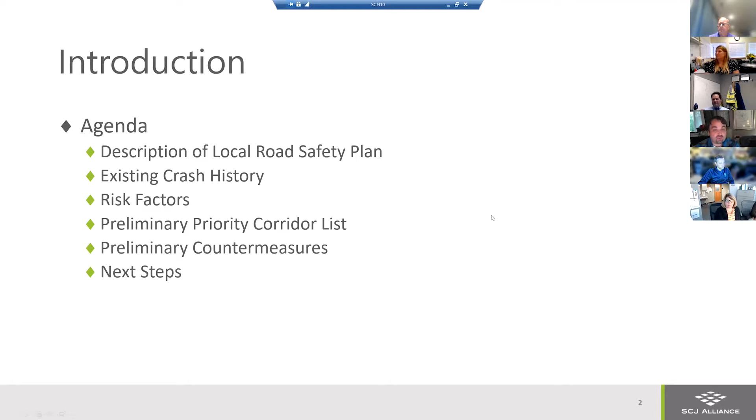For today, I'm going to walk through what a local road safety plan is, talk about the crash history for the city, and then walk through the process of determining risk factors and priority corridors, and then potential countermeasures. I don't know how many of you are familiar with the term local road safety plan, but the idea behind it is that it allows a city or a public agency, counties, states, at all levels, to take a data-driven analysis approach to safety and specifically focus on fatal and serious injury crashes.

That's been a bigger and bigger priority, and Target Zero, a statewide program, is really focused on trying to reduce and eliminate fatal and serious injury crash types. The data that we get for this process is provided by WSDOT. Whenever a crash occurs, police report to the scene and file an incident report that gets collected by WSDOT. WSDOT maintains a statewide database of any and all reported crashes in the state, which they make available to anybody. And we've solicited the last 5 years of crash data to try to get a representative snapshot of what's happening in the city.

And I would say too that while the data set's pretty robust, it only contains crashes that were reported. There are likely to be crashes that occurred that were not reported. And even more specifically, everyone's got those near miss experiences that weren't actual crashes, but were very scary and could have potentially resulted in a significant crash.

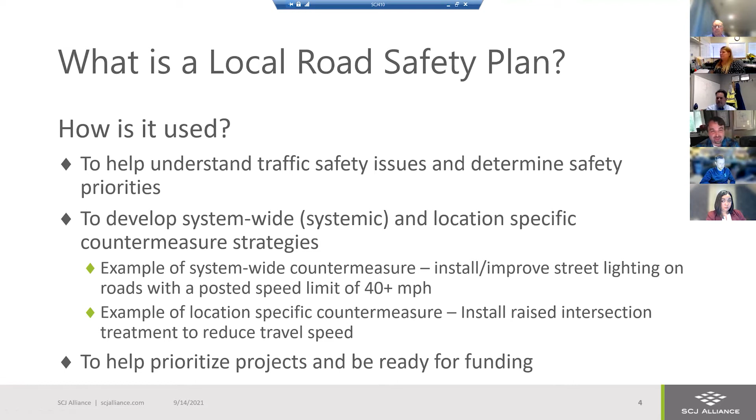So that's kind of an overview of what the local road safety plan is and what it's aiming to achieve. If there aren't any immediate questions, I can jump into the existing crash data that the city of Shelton has had.

We didn't specifically dig into crash rates for this effort. We were focused more on the individual serious and fatal crashes. And that's kind of what's driving the overall goals of this plan, but it's still good to know where the overall crash tendencies are. And so among those 832 crashes, there were 16 that were either fatal or serious injury crashes, which was about 2%. And overall, that's not necessarily out of line with other communities, but still 16 is a lot.

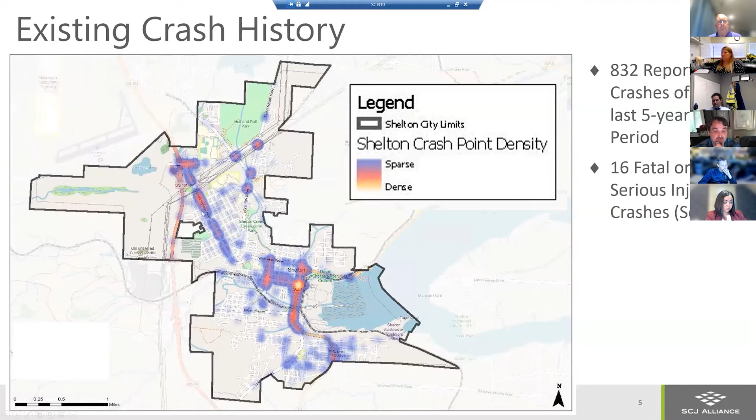And it's not hard to understand that those are especially vulnerable members of the roadway. And so when they're involved in any crash, the odds of it becoming a serious or fatal are much higher than two vehicles. But even with that, this was much higher than you would maybe see in other jurisdictions. So without having finished the process, we immediately assumed that this would be a focus of the study.

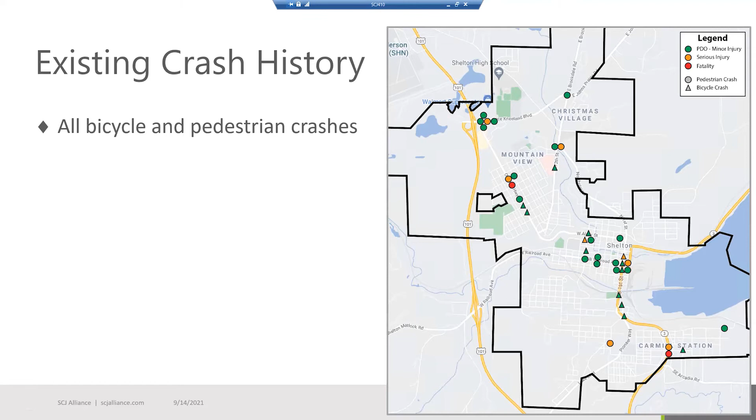So once we went through and looked at the crash history of the city overall and narrowed in on the serious and fatal crashes, the next step of the process is really breaking down each of the serious and fatal crashes and identifying the contributing circumstances or the roadway conditions that were present at each of those crashes. And those were referred to as risk factors, elements that seem to potentially have been contributing to a serious or fatal crash.

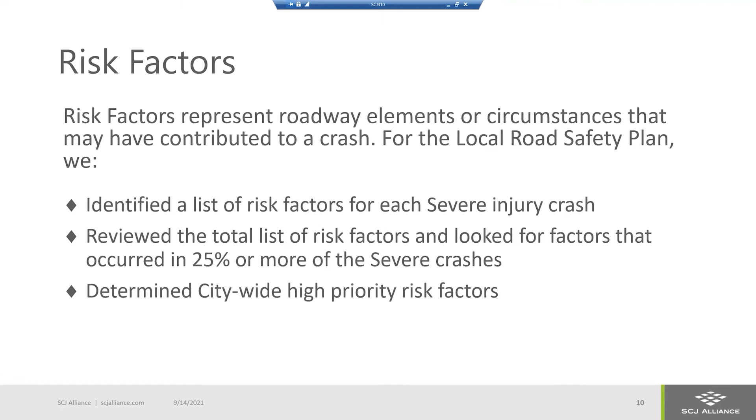So the process of a local road safety plan is to go through and individually identify those risk factors for each crash. And then when you've done that, you create a matrix where you identify how many instances each risk factor occurred for. And the methodology outlines that if you have any risk factor that shows up in 25% or more of your serious fatal crashes, it becomes a priority risk factor for that community. So we start to look for trends across the different serious fatal crashes. And once we did that process, we came up with these as our high priority risk factors.

And going back to what I was discussing a little bit ago, hitting a pedestrian or inattentive pedestrian crashes located along roadways. It wasn't surprising that pedestrian and bicycle elements were prevalent in this list because so many of the fatal serious crashes involve bikes or peds.

But what was a little surprising was that we really weren't finding any other risk factors that were consistent across the crashes. In the city, almost all the roads are low speed, so there wasn't really a high speed element to consider. A lot of these were on straight level roads, which is true for most of the city. Some were at intersections, some weren't. But again, there was no detailed distinction between these crashes, except that many of them involved bikes and peds.

So we went through a couple times because we were really trying to make sure we weren't missing something more broad. And there really didn't seem to be any themes to these 16 serious and fatal crashes, except that many of them involved pedestrians and bicyclists.

And so the next step in this process is typically to take your risk factors and apply them to your top corridors. So you say, okay, if these are the 5 risk factors that this city has, let's see which of our corridors that have a lot of crashes have those risk factors. And then those can start to be priority locations for potential systemic improvements.

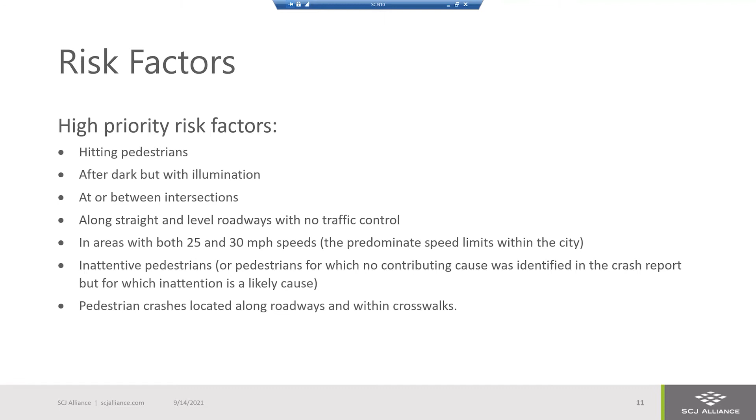Well, in this data set, really the only common trend was bike and ped involvement. We felt like that means let's go back to that map of all the bike and ped crashes, understanding that the serious and fatal ones were already bad, but any incident involving a bike or a ped could pretty quickly turn into a serious or fatal crash. And then match that with our list of corridors that we showed above.

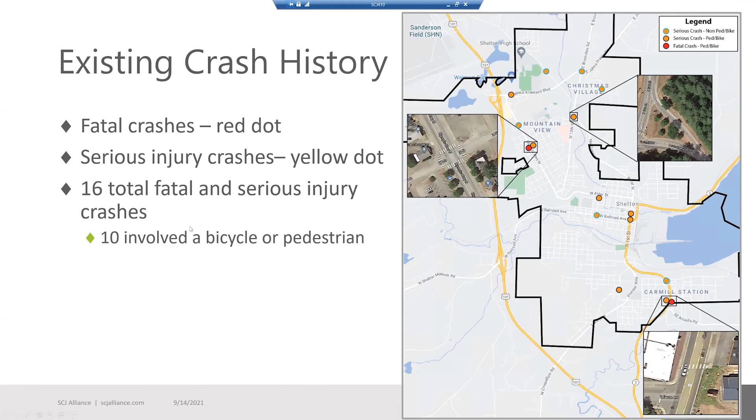And so we'll make that assessment, we'll work with the city and decide, for this crash, was there a deficiency at the intersection that we can resolve with a countermeasure? And if so, it'll be on the list, in addition to these corridor-wide priority areas.

So having said all of that, again, we're still in the process of kind of honing in on what exactly we want to recommend, but these next few slides kind of discuss countermeasures that can address some of the specific issues that we're either seeing or hearing about. And so these mini roundabouts, which aren't necessarily the same as a legitimate roundabout controlled intersection, can be located, especially in neighborhood corridors, as a way of calming speeds.

The city has some speed signs that they've recently been able to locate in different corridors in the city, and they can run those in ghost mode so that they're recording speed data without actually flashing your speed and telling you you're going too fast, and then they can turn it on and then it will flash, oh, you're speeding, slow down. And then we've been able to get a little bit of that data to just kind of digest, are there some clear speeding issues on some of these main corridors?

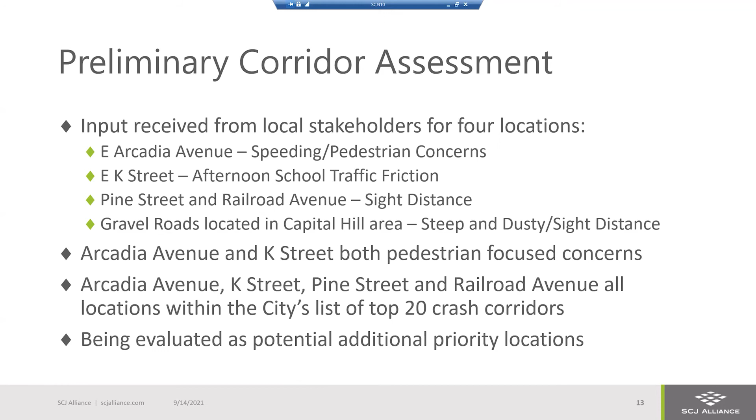going back up to here, East Arcadia Avenue was one of the spots that a local resident has expressed concern about multiple times. So the city very recently was able to put these signs up there. And again, in a broader sense, we didn't see any consistent themes of speeding, but I believe the high speed recorded was 67. So that's an obscenely fast speed for any of the roads in the city, but for a neighborhood like that, it's hard to say how much you want to chase down that one driver that was feeling reckless, but an improvement like this would make that much more difficult to do.

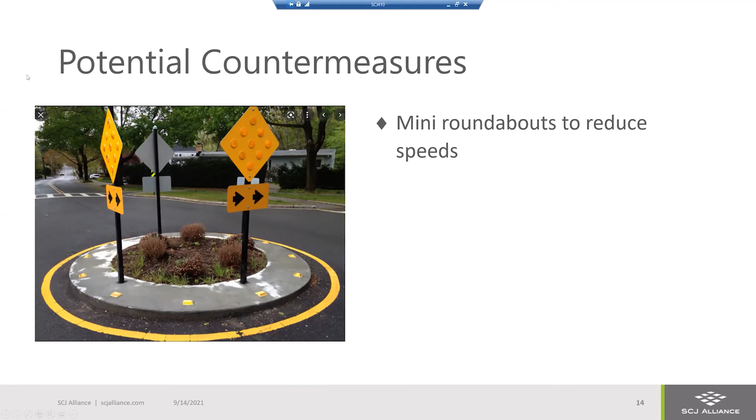So this is one of the potential countermeasures we're kind of expecting to include as candidates in the systemic corridor improvement, almost like a menu. If we were on our corridor, what things could we consider depending on the spot?

Another one, and this has come up a couple of times from you guys, is these curb extensions in areas where there's on-street parking to help minimize the crossing distance and also improve visibility. So these are really, really helpful in areas where there's on-street parking, and multiple corridors that we've identified, I know in downtown and also on Olympic Highway North, there is on-street parking space.

So even if there's not cars parked in it, as soon as the pedestrian steps off the curb, they're now at risk. And so the longer that distance, the more exposure, the more risk there is. And Joe mentioned something to this effect too, that he doesn't like the crossings of the four lane roads. That goes straight to this point, that the longer you're exposed, the more likely it is that something can happen. And so this is one of the ways that you can reduce that exposure while also maximizing the potential to be seen.

Megan, I see a hand on your screen. Did you want to go ahead?

Just wondering, in your experience working with other cities and downtown corridors and small towns like ours, have you seen additional designs like this with curb extensions to reduce the crossing distance, as well as similar designs that extend businesses out into parking areas to give them outdoor seating and whatnot? Have you seen designs like that that have helped reduce the amount of traffic, or the speed of traffic and whatnot? I recently was in Walla Walla, so that's why I asked about that.

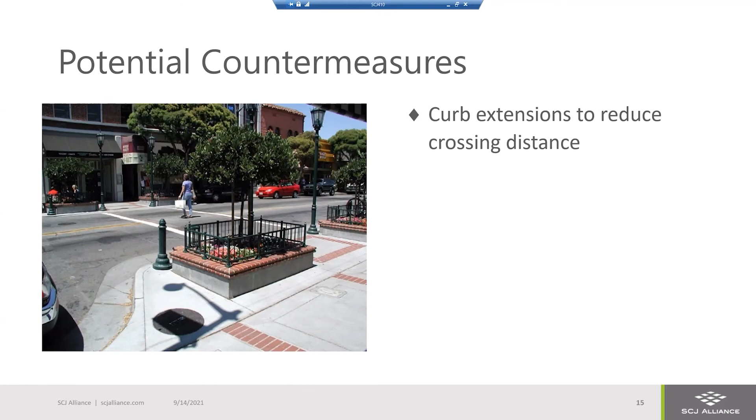I don't know if it's the right time to start talking about this, but I'd definitely like to talk more about prioritizing a project like this each year. I know we have some focus areas on roadway maintenance and improvements each year in our budget, but I'd like to consider prioritizing at least. Outside of the existing capital improvements, if we're doing other roadway improvements, we would resolve any safety issues at the time when we're doing that construction. But outside of that, if there's areas that we can prioritize, a project or two a year amongst some of our residential paving and other types of stuff, I'd be interested in having conversations on which of these projects would be feasible.

I know we have a limited amount of funding we can throw at this, but even potentially adding similar projects to our legislative priorities. I know Safe Routes to Schools was another opportunity through the TIB for some of this type of stuff, but I think the data that you presented was very helpful in wanting to try to tackle this one. So just throwing it out to the council. I like that idea, Joe.

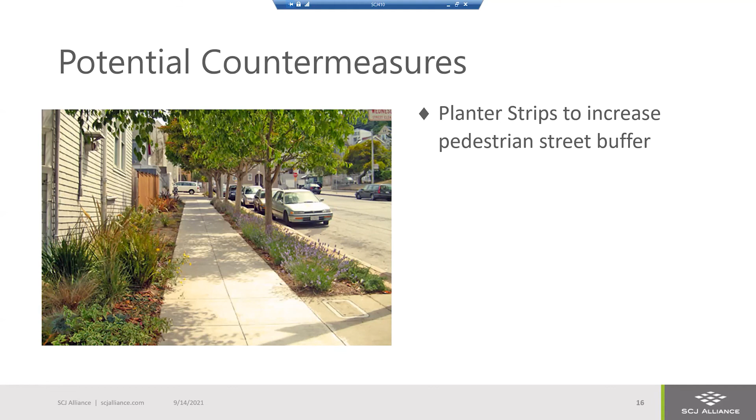It got mentioned earlier that the crossing for the junior high has got flashing lights, and so a way to amplify the visibility and safety is to have a truly signalized pedestrian crossing, and RRFB specific treatments are shown to be best performing in terms of vehicles adhering to them, or not enforcement, but success rate, I guess you would say, of the vehicles reacting. RRFBs specifically seem to have really good performance metrics for that.

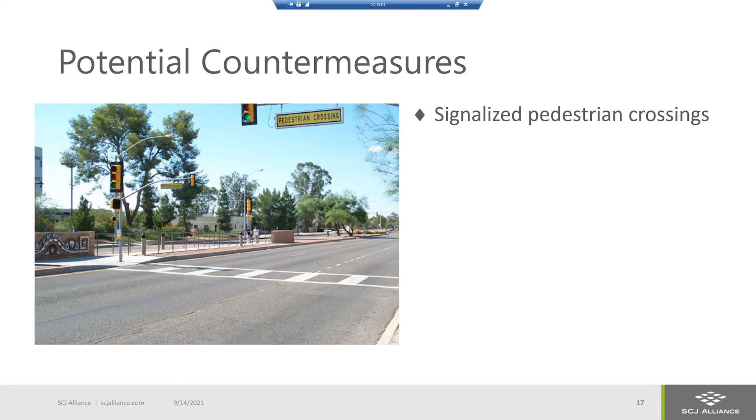So I think in specific spots, the junior high crosswalk for sure, and potentially other locations in the city where there are these uncontrolled crossings in the middle of a potentially high volume corridor, this is a specific improvement we almost certainly expect to have in the plan as a systemic improvement, and then likely multiple specific spots where we would maybe advocate for this treatment.

And then another one that hits on an earlier comment, this idea of refuges in the middle of a roadway. So yeah, the 4-lane, even 3 lanes actually work really well for this sort of treatment, because you can install it in the existing 2-way left turn lane space. But the more travel lanes there are, the more exposure. So this is just another tool in the toolbox for reducing that amount of exposure.

And I think this is one we would almost certainly expect to have in the plan as a systemic improvement. And then we'll be working with the city to figure out if there's specific spots we want to preemptively recommend this treatment for.

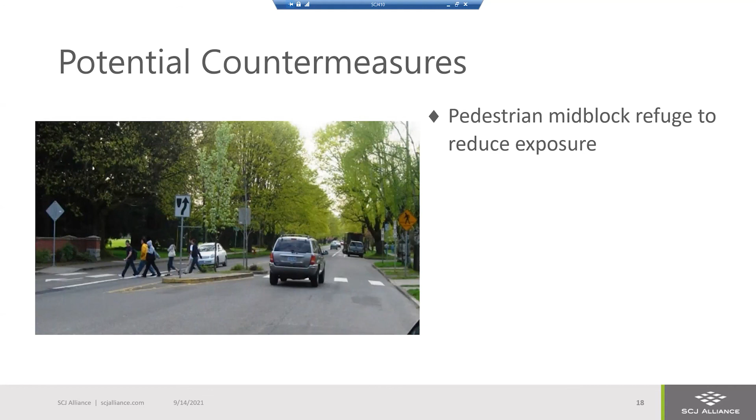So that's not the entire list of what we would potentially have in the plan, but those are some of the initial countermeasures that we've honed in on, knowing that pedestrian and bicycle safety is the priority. As we dig a little bit more into specific spots within the corridors that may be candidates for a recommended improvement, there could very well be other countermeasures that make sense. Those countermeasures that I just walked through all feel like systemic improvements that can be broadly considered on the corridors that we've identified as appropriate.

Like I said before, a menu of considerations, and I would expect likely most or all of those to be in the plan with a planning level cost estimate attached to them. The nice thing about those improvements is that by and large, their price tag is consistent regardless of where. The planter strip might be the one exception to that, but a lot of those other ones are really not going to cost more in one part of town or the other, versus some improvement types will depend on the specific spot, especially when there's right-of-way involved. If there's a right-of-way take needed, that dramatically changes the cost, and it would be specific to a spot.

But most of those improvements we can come up with a broad price tag for, and that'll be applicable wherever those improvements make sense. So I inserted this slide in the narrative earlier where I was asking for feedback. I've got a lot of notes here for some specific concerns or observed areas of interest, and that's exactly what we were hoping to get.

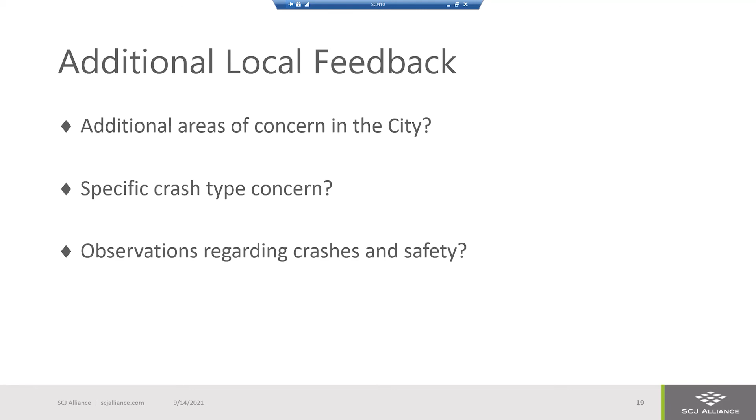And then the idea being that we'll try to get positioned for funding, specifically from WSDOT, for whatever funding sources are available. They're always going to be looking for the plan that proves or shows that need. And so we'll have that plan. So that's where we're headed. And I guess that's all I had. So if there were any other comments or questions, it's been great to share this. And I love that everyone had a chance to share their own thoughts and concerns. And we're going to do everything we can to get all of those in here, because this plan is for Shelton, and whatever we can do to address all these issues, that's the whole point of this.

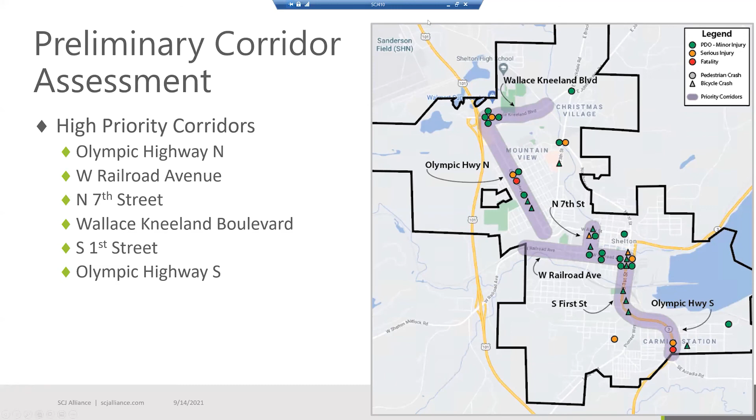All right, council. Does council have any more items for discussion tonight? Seeing none. This study session is adjourned at 7:04.